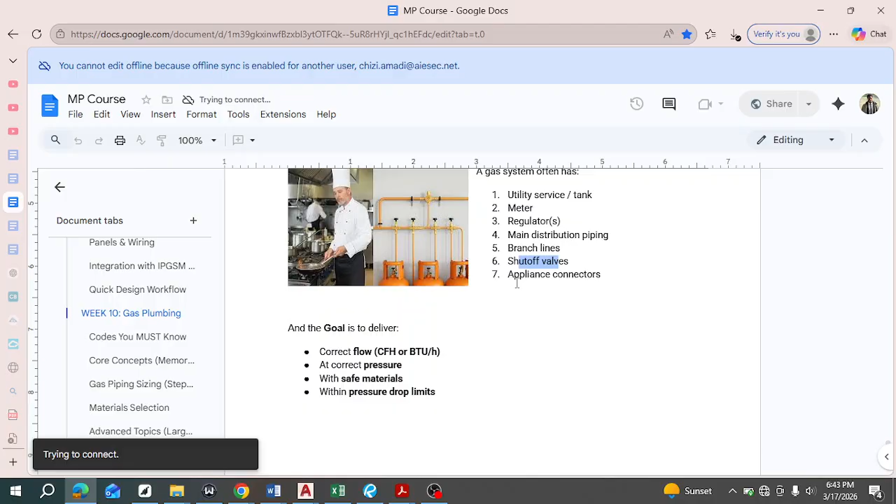Another thing is the appliance connector. So for each of the branches, we have the connectors. Each branch is going to a particular appliance. So how do you connect it to the appliance, right?

So next, the goal of this design is to deliver correct flow, that is the quantity, the volumetric flow. And CFH, you'll be familiar with it because it stands for cubic feet per hour, just like CFM, cubic feet per minute, in our air supply systems, our HVAC equipment. Then BTU, still close to our HVAC too. BTU is British Thermal Unit. So it's a measure of the amount of energy, right?

So this flow is referring to either the volume or the amount of energy, right? So then it also needs to deliver the correct pressure, and we use the safe materials with the safe measures and within the pressure limits, right? Because if it's too low, the system is not going to perform optimally.

If it's too high, it could lead to bursts and leakages and many other problems that could stem from it, right? So that is when the pressure is too high. I mean, pressure drop means that the longer the pipe, the lower the pressure is over the distance, right? So when it starts at the beginning, it's the highest pressure.

So you have to select a pressure such that by the time it gets to the last branch or the last appliance, the pressure is still sufficient, right? So another thing we are talking about is the codes, right? So each of the designs from plumbing to drainage through to HVAC, they all have codes to be followed. In fact, there are so many codes. There's the building code, the plumbing code, the gas code, right?

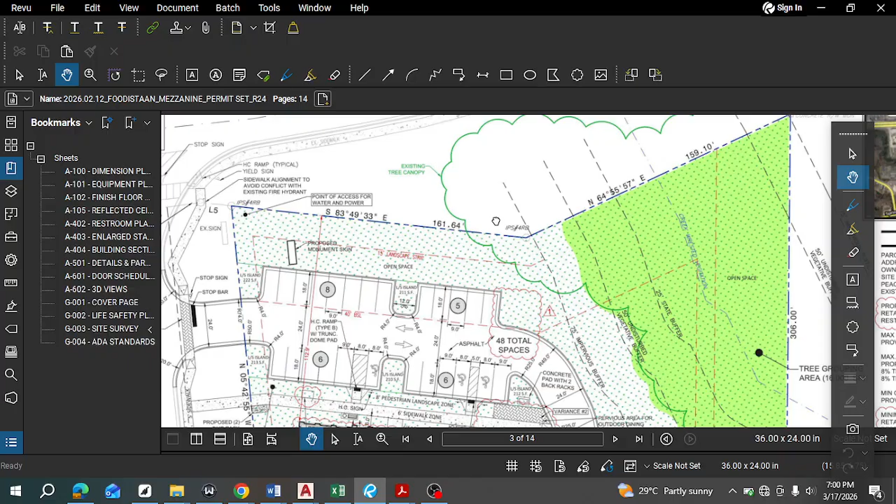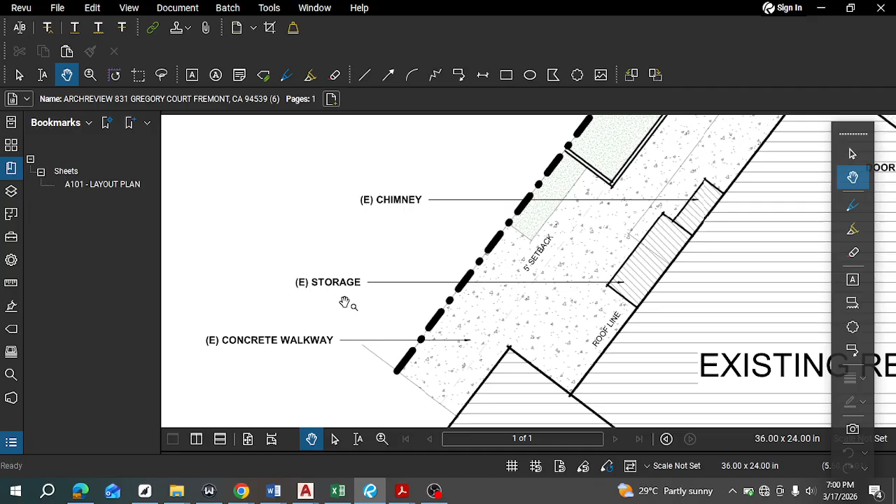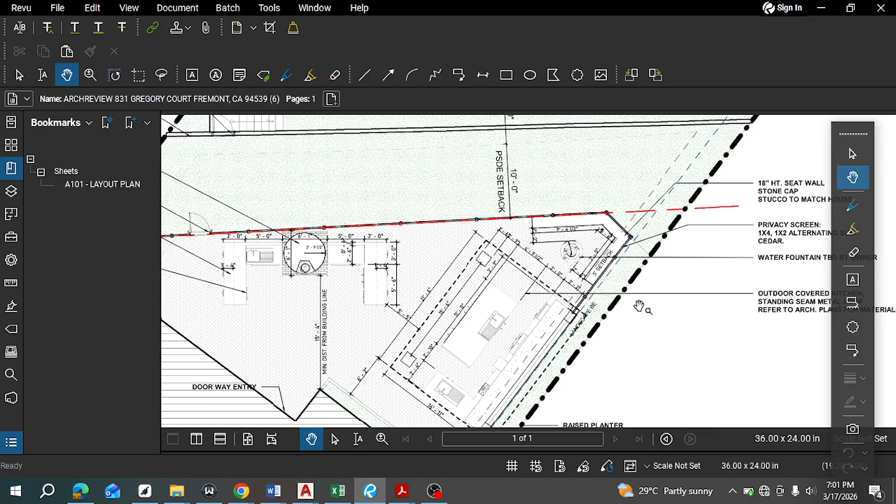For example, I spoke about how sometimes some gas systems use a tank. So in a plan like this, you might see such. Some important information of what areas around that place look like. So water fountain. Okay, this is an outdoor covered kitchen. This is a project we're going to work on soon. And there's a property line, which separates it from the next yard. So it can guide you: okay, this is where I'm going to set certain designs from.

That's what you do. Next, you measure the longest length. This is very similar to water supply plumbing. So measure the longest length. You would have seen, let's even look at a project. You would have seen the types of, okay, let's do this really quick. You would have seen the type of, okay, it's not here. Okay.

I'm looking for a, it's okay.

Let's just continue, right? So measure the longest length, like we measured. So the distance away from the meter, the gas meter, right? The longer the distance, the higher the pressure drop, right? So that's why this is important, so that you can size your pipe accordingly.

Next, you will now use the code sizing table. So these are like the two starting points, right? Then you now use our code sizing table. In this case, we're going to be using table 402.4(11). Oh, this is not supposed to be metallic pipe. There's a mistake here.

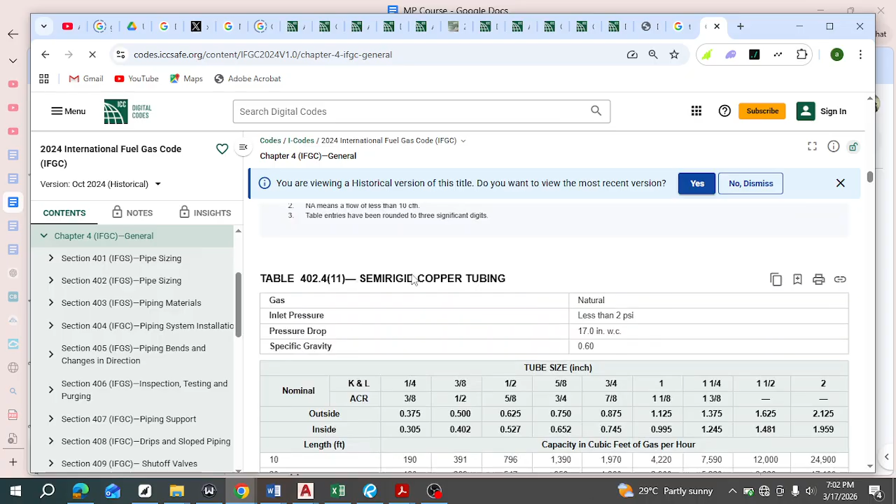So let's look for this table, right? I already looked it up, so it's just a matter of finding it. Wait a little, right? Oh, it has not. Okay, yes, it is. Right. So now, are you serious? Let's try and connect and load this page.

So just like the table for water supply, the table gives us an idea of different materials, right? Let's wait for it to come up. Okay, it's coming up. There are different materials and there are different loads, different distances. So starting from the beginning, you can read through all this for more information, but that's what we're looking for. Okay, these are the different tables.

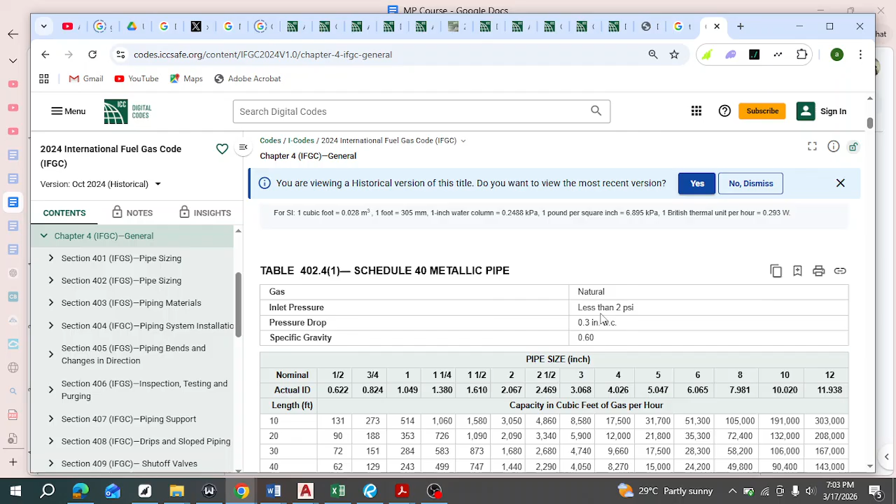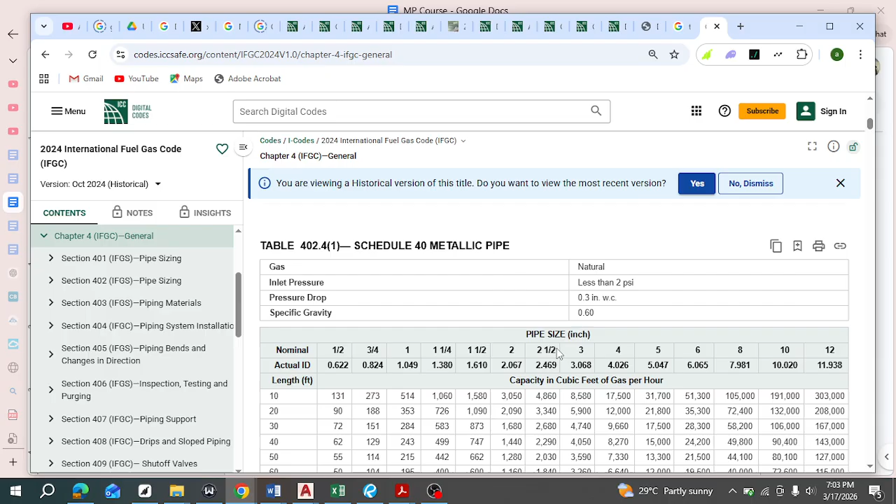It starts from one, which is metallic pipe, and you can see the type of gas, the inlet pressure, the pressure drop over the distance, not the entire distance. It's unit pressure drop. Then this is how you size the pipes accordingly. These are the capacity, cubic feet per hour, and then this is the length. That's how we trace and find the right size of pipe to use.

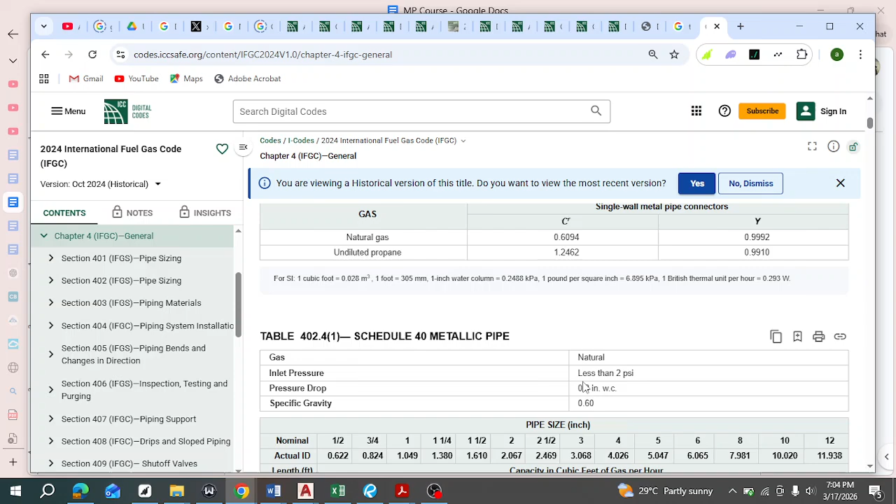So if your total supply is maybe 300, you come to here, and then use both the length and the total load. For example, the length is maybe 80 feet, come here to 300, so I go around here. That means the main distribution pipe will be around 1 1/4. That's if you are using natural gas, because there's also a place for propane gas too.

There's natural gas, then these pressure levels. But most times we don't use pressure levels that are that low, so you see it's changing. As you are increasing, this number is changing. So we have gotten to a higher pressure drop. Let's see this one, even higher, 3.5. We are still under natural gas too.

The one I'm going to use to do a lot of explanation, you can see that the material has changed. It was initially metallic pipe at the beginning. So please, I would like you to go through this chapter and read up more about it. So let's use this. We've seen all of this already.

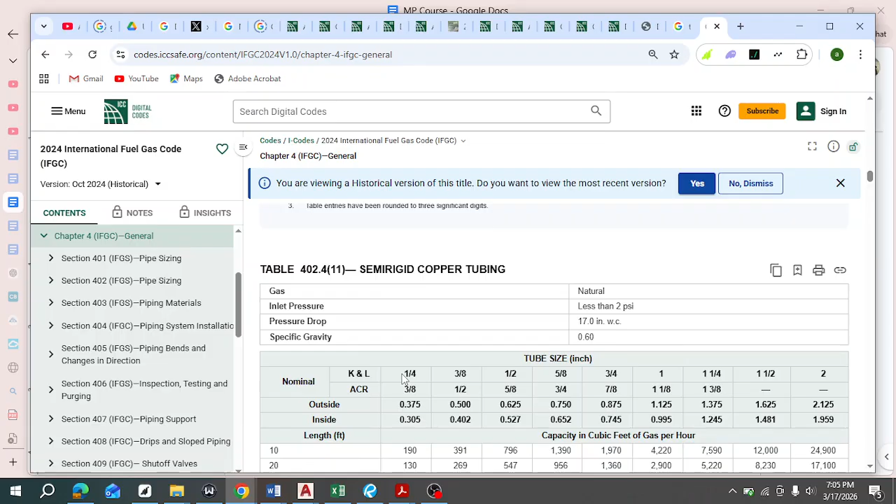This is less than 2 psi, so it's already a low pressure situation. We have two different types of pipe. Please look up what these mean: K and L semi-rigid copper tubing, and ACR. We're going to use K and L. So this is what it looks like. That's the table we mostly work with for general projects, while if it's California, you check if California has its own corresponding table.

Then next you size each branch and section. There's a document I use for doing this, a standard document called B703. Let me show you how. Okay, this is the document I was talking about. It's a standard document, just a 2-page document. Let's quickly run through what it contains.

So this is a brief schematic of what a gas layout looks like. It's a schematic with minimum information, but for you to understand. This is the gas meter, this is the main distribution pipe, and these are branches off of it.

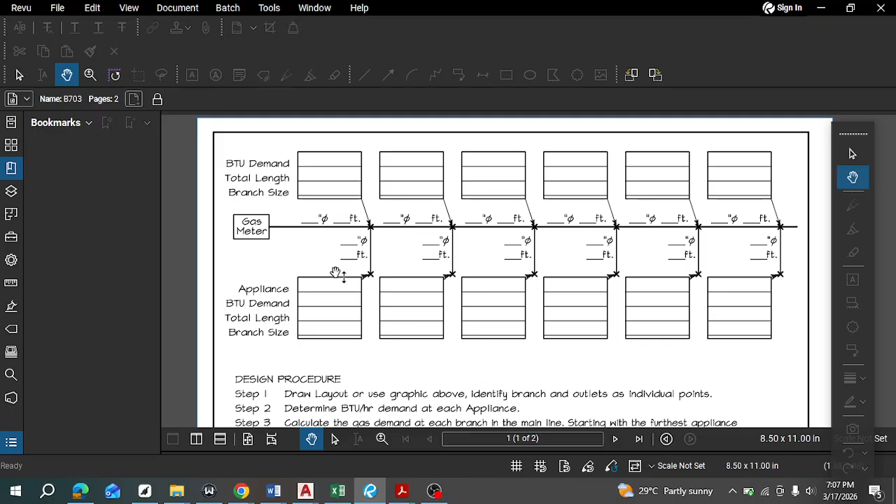Right, then we have the appliance name here, the BTU demand. Let's scroll to where we have the total length, and then the branch size, right? So we have: draw layout, use graphic above, right? So you can draw this when you're designing a gas plumbing plan, right?

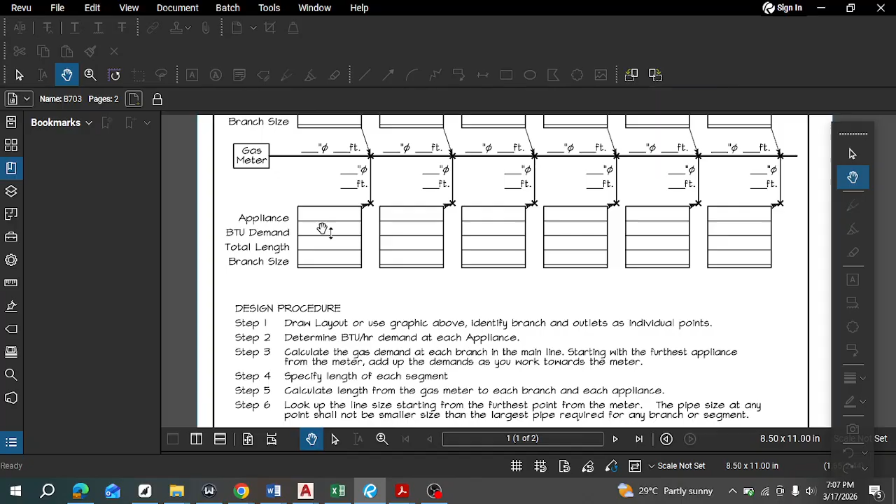You determine the BTU per hour, calculate the gas demand on each branch, right? So we are talking about each branch now. Start with the furthest appliance, right? And then add up the demand as you work towards the meter. Okay, this is what it looks like. So this is the appliance, this is the BTU demand, and the length, not the maximum length, but the length up to that point, right? This is at each branch.

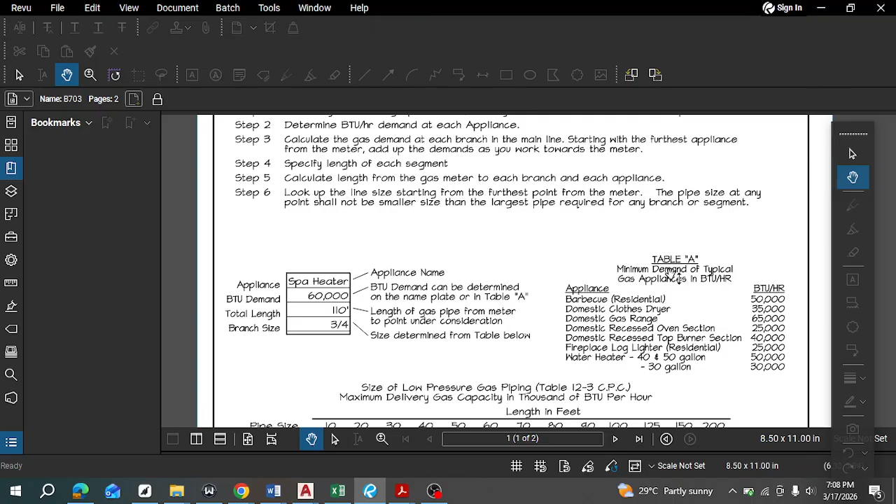Then look, as I mentioned earlier, we have average values, right? If for any reason you don't have access to the specification sheet of your appliances, you can use these values. They're like standard values. But if you have it, it's better to use that. This is in case you don't, like a last resort. You have a fireplace, 25,000 BTU. You have a range. You have a clothes dryer, right?

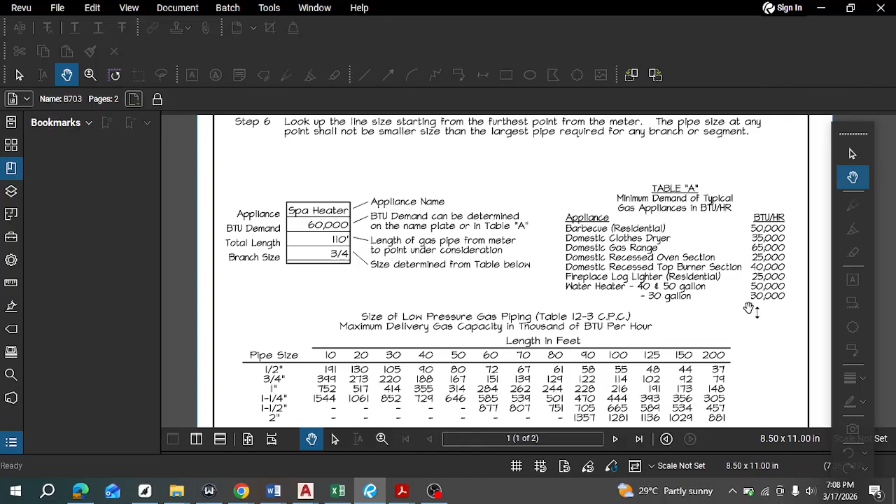You have water heaters of different gallons, different volumes. This is a tank water heater, right? So you can't use the same values for tankless, because tankless usually demands a higher amount of gas, or consumes more energy. That is why I generally don't like choosing tankless water heaters, even though they provide water on demand. The energy consumption is usually very high, because you have to produce a lot of water within a short period of time, as opposed to a tank that produces it at a lower rate and then stores it.

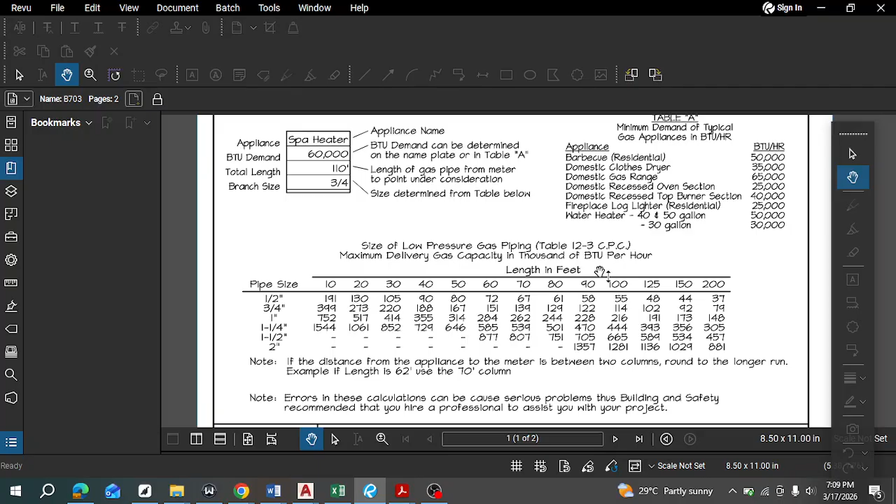So yeah, this is the table. This document is actually directly related to CPC, chapter 12 we spoke about earlier, that is California Plumbing Code, right? Okay, these are some notes to take note of. This is just like how we had that sizing table. This is what the table for California looks like. You notice they've referenced where they got it from. You see the pipe sizes, you see the length, then you see the total load, right?

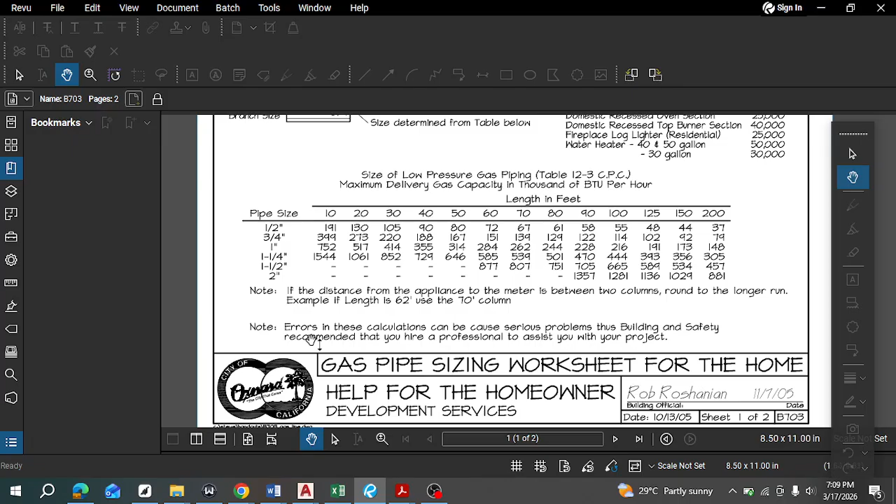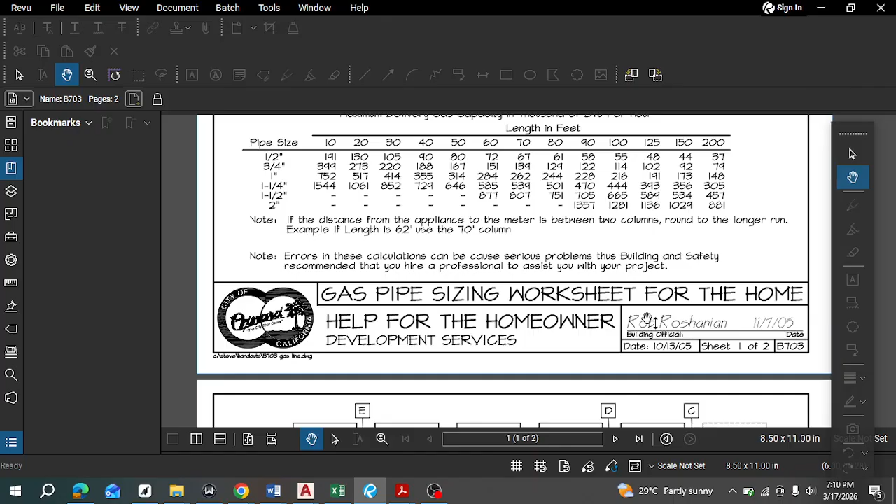So just to understand it: you can see errors in the calculation, so there's a lot of disclaimer, a lot of warning for you to pay extra attention. See the name here, prepared by a professional, obviously. So now this is an example of how to size. We have six branches or six appliances being served by a gas plumbing system, right? Thankfully they all come with their BTU demand. So now let's quickly study what all this information is.

So here you see this is a sign of diameter, so this is the main pipe diameter. At the beginning it is 1, then as it goes towards the end it reduces to 3/4 here, 3/4 here. Now this is the distance. So from this gas meter to this first branch is 10 feet. Then from this branch to this branch is 20 feet. Now from the point where it branches off the main distribution pipe, the appliance is 100 feet away.

So when you are checking for the total load, you take that entire distance, because the gas has to travel this 10 feet plus this 100 feet. That's why I have 110 feet here. Same here, it has to travel 10 feet, 20 feet, and then 5 feet, so you add everything up and it gives you 35. Then from here it travels 10, 20, 20, that is 50, then an extra 10 feet, which gives us 60, right?

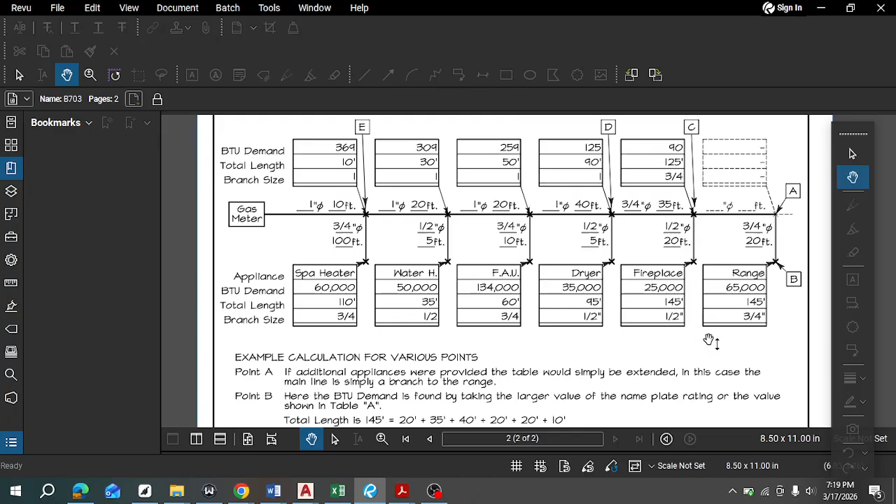So now we take 150 and then we check the capacity of the pipe, the BTU demand, which is 92, right? Is it 92? Okay, in this case, 92 exceeds. Yeah, it's 92. That's for point B. So we are looking for 65, which is what we have here. But when we trace this down, we have to select a value that is higher than or equal to 65, which is 92 in this case. So 44 does not serve because it will be insufficient. 173 is too large. So just the next highest value, right? So that's what we use.

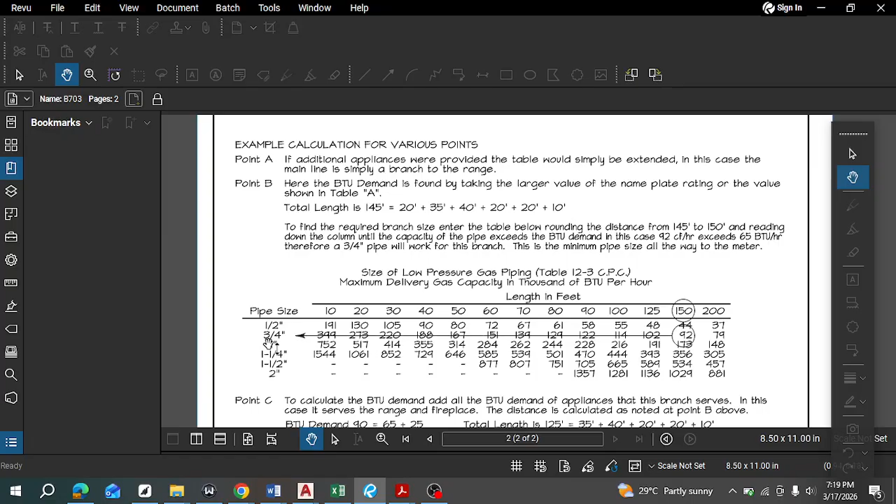So now we take this distance and this gas demand, and then trace it back. So it means the pipe for that point will be 3/4 inches, right? And that's why we have 3/4 here, 3/4 here, right? Now let's check for another point.

Point C. Point C in this case serves the range and fireplace, right? So which is range and fireplace? Point C is this, right? So it means it's serving both this and this. So the total distance and the total demand will be different too. So let's check. The total distance is calculated from here, which is 125, right? And then the total demand is 90, right? So let's check it.

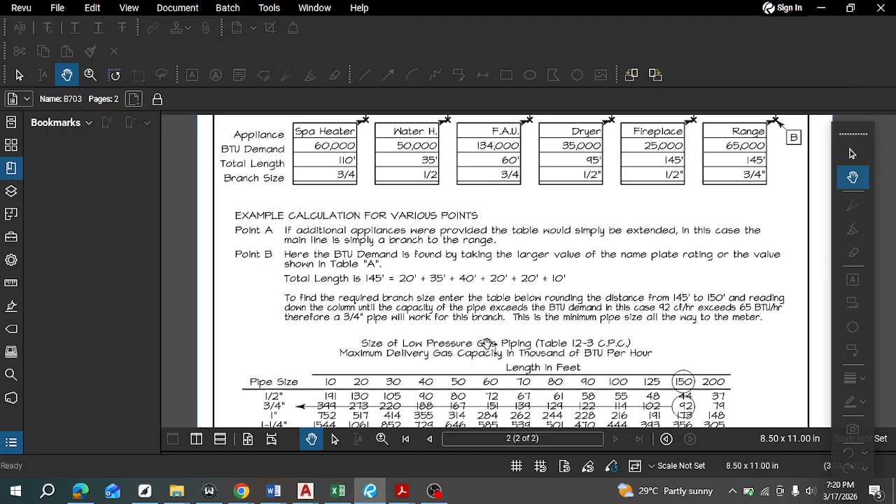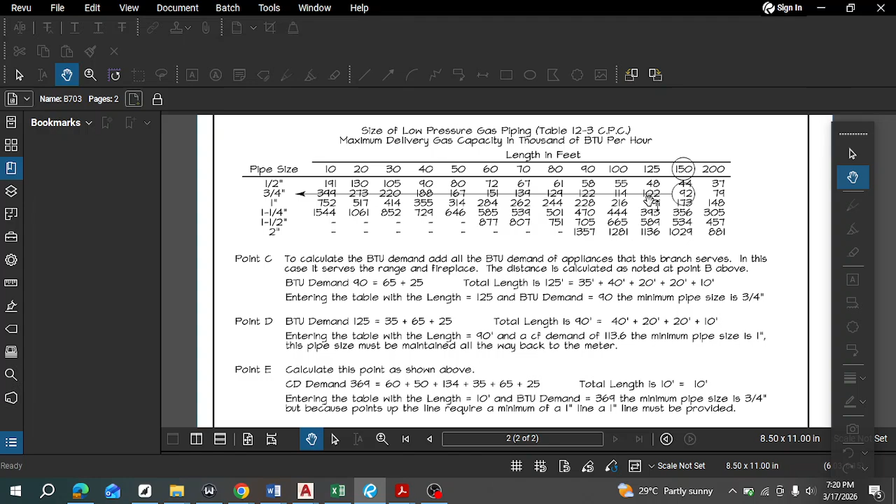Okay, you can see here BTU demand is 65 plus 25, because at that junction it's supplying two things. So that's why we have the total, right? Because when it drops to this guy, it moves on and gives another guy. Then the total length is reduced. So as this one is increasing because it's going backwards, that one will be reducing. So when you check, you go to 125, and then 90, you go down to the point of 90, and 102 is the closest point. You have 3/4. So that's how you just continue for the rest of it.

We have the shut-off valve, like I've explained before. It should be placed at the main entry point, because you may need to shut off the entire gas supply, and then at the individual appliances. So if there's something you want to do at an individual appliance, or in case of an emergency, you shut it off at that point while the others keep receiving gas, right?

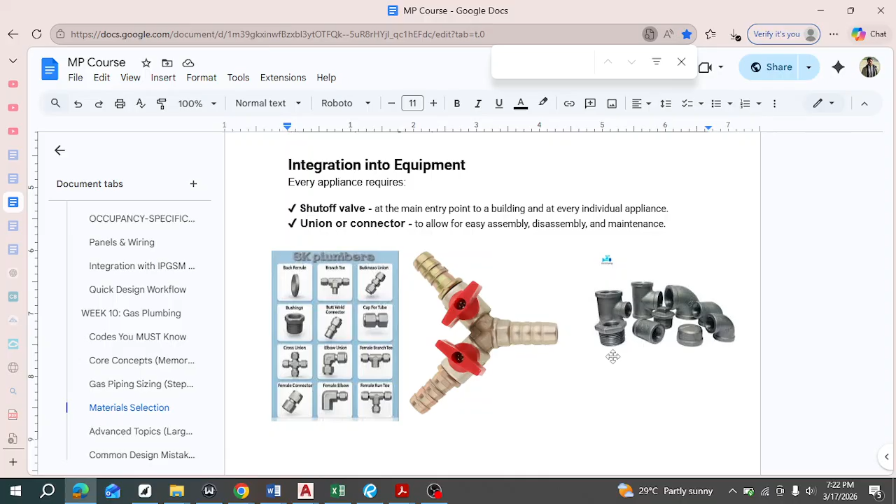Then you have the union or connector. As the name implies, it's used to connect, right? Just like how we have fittings. If you need to connect two points and then maybe release at one point, you have the different types of fittings, right? So you look them up.

Then we have the sediment trap, very important, right? You may not show it on the design because it's very small, but it has a very important purpose. It is required for appliances like furnaces, water heaters, and boilers, to collect debris and moisture, preventing burner clogging. This is a kind of safety measure, because gas usually flows with impurities if it's not very clean. There are different levels of purity, so particles, then moisture too.

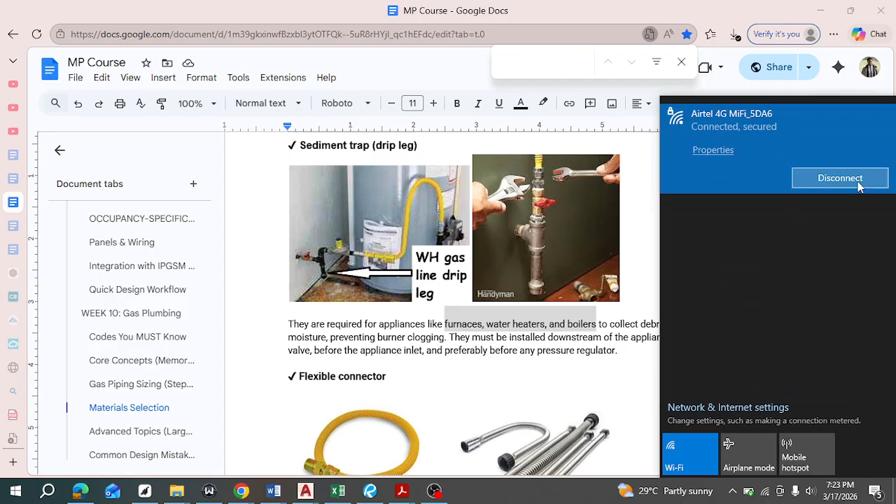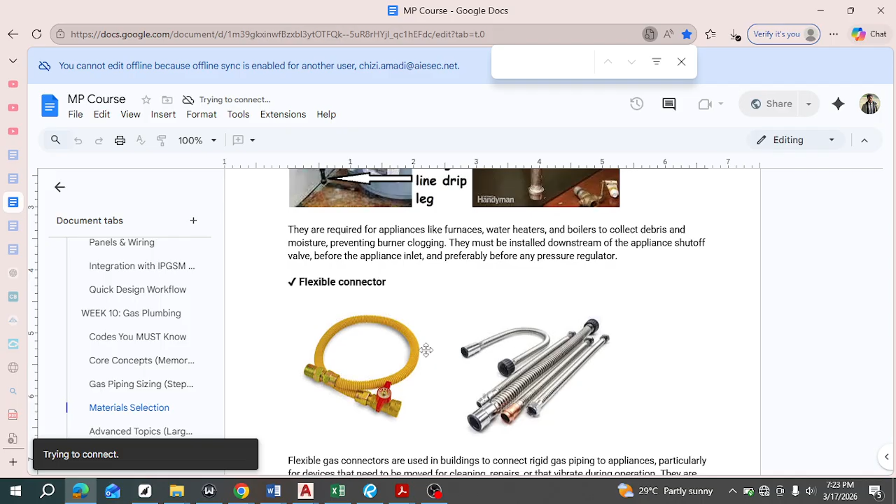Then you have the flexible connector. The flexible connector is used to connect to rigid gas pipes. So we have the main pipes and then the branches, particularly for devices that need to be moved for cleaning. You know that the main pipes, solid pipes, are rigid, as you've seen here. If there's vibration or movement, they can crack.

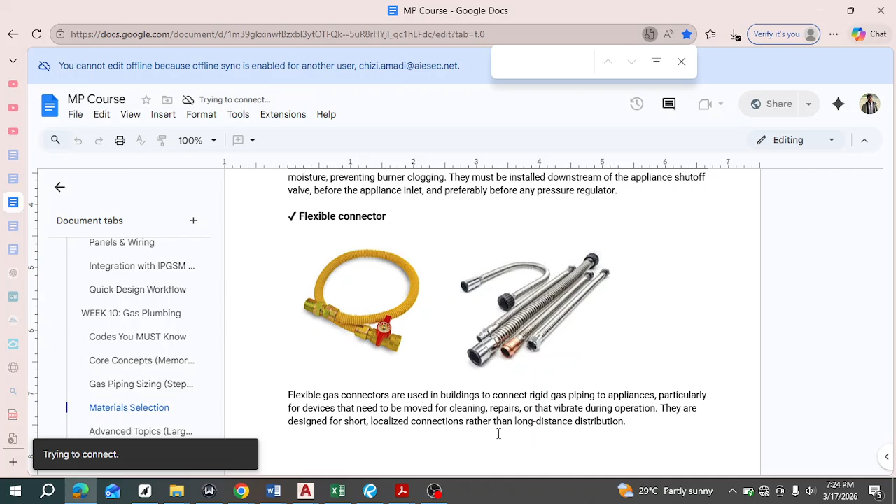So it's important to attach this just at the point of connection, in case it vibrates during operation. It is designed for short localized connections, so it's not for a long distance, just for that small connection. It's like a wire, so it has room for being flexible, which reduces chances of cracking or leakages due to shaking, right?

So that is the end of the class. Let's quickly look at a project before we call it a day. Let me check how many minutes we spent first.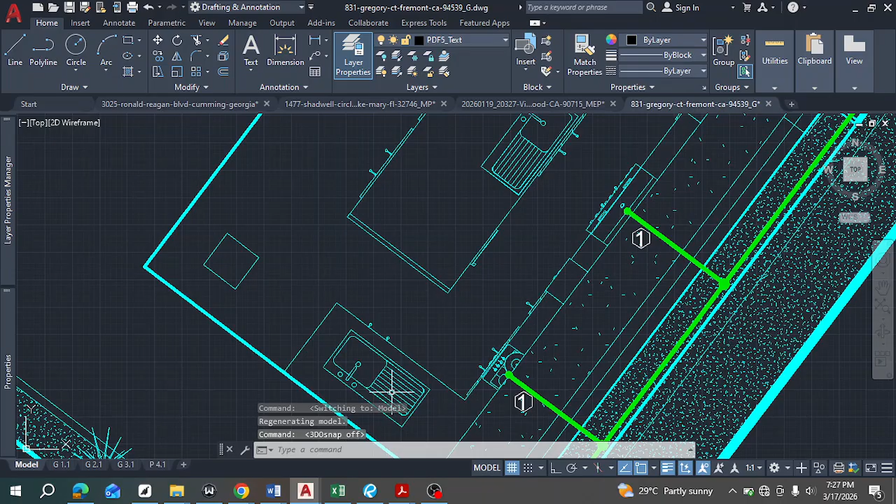Okay, let's look at this project real quick, right? So to save time, I've already shown you the layout, so you understand how all of this works. We have just 3 appliances on this. So this is where our layout comes from. This is our gas meter, because we got from the site plan that this is where the gas line runs, so it was important and expected to connect it from this point, right?

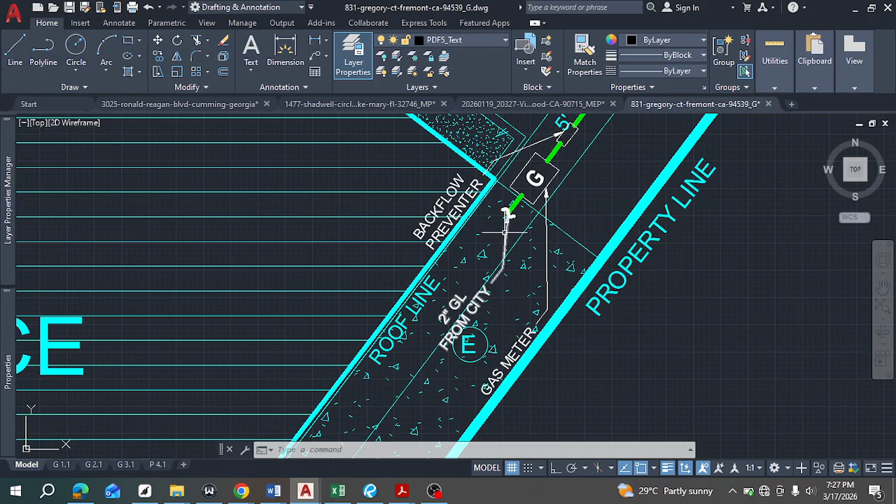So just like in freshwater plumbing supply, we have our backflow preventer to prevent gas from flowing back. Then we have our meter as necessary. Now we have our pipe sizes; we'll look at this shortly. So this supplies to this point. There's a range here. When you go forward, there's another. Let's check what this is. Okay, we have the burner, which is like a range, which is the closest to the gas meter. We have the grill. We have the fire pit, right?

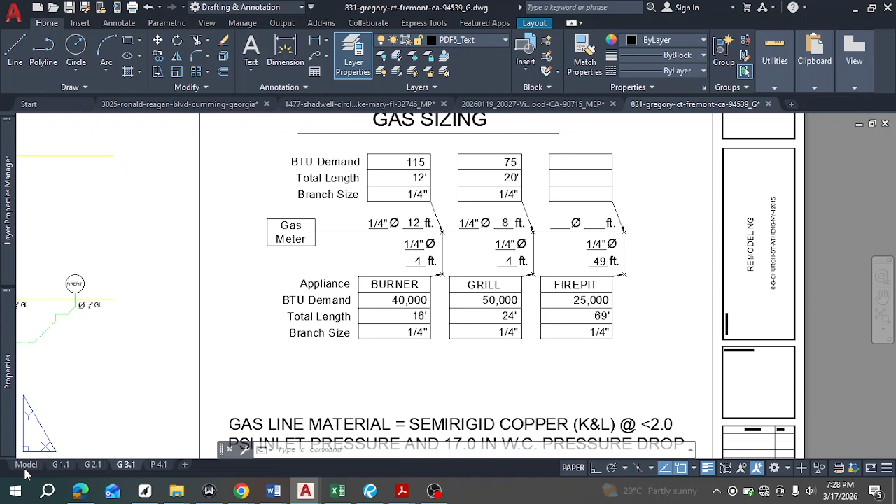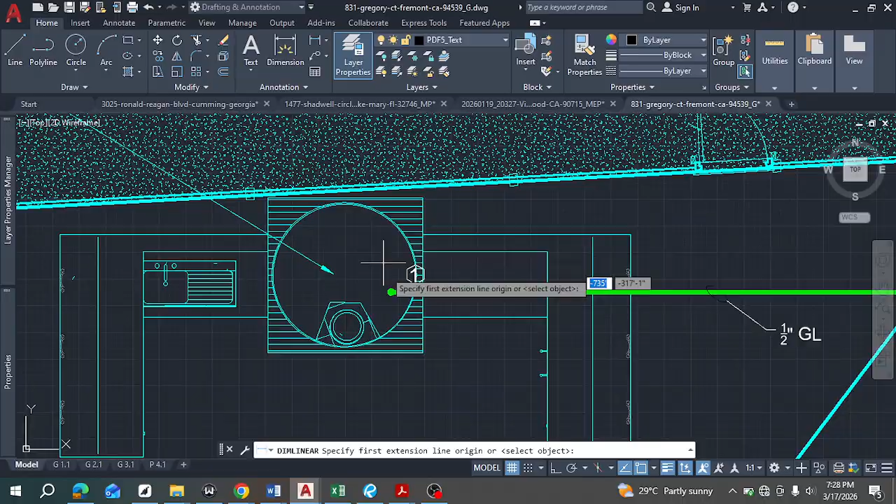So the major thing is sizing, right? Sizing. So we have a fire pit here. This is the farthest point away, so you have to measure your distance up until this point. Let's measure that distance quickly. You already know how to do it, but let me just give you an idea. So this is how it works. Okay, measure this, 31 feet, for example. So you do that for all of them to get your total distance, right?

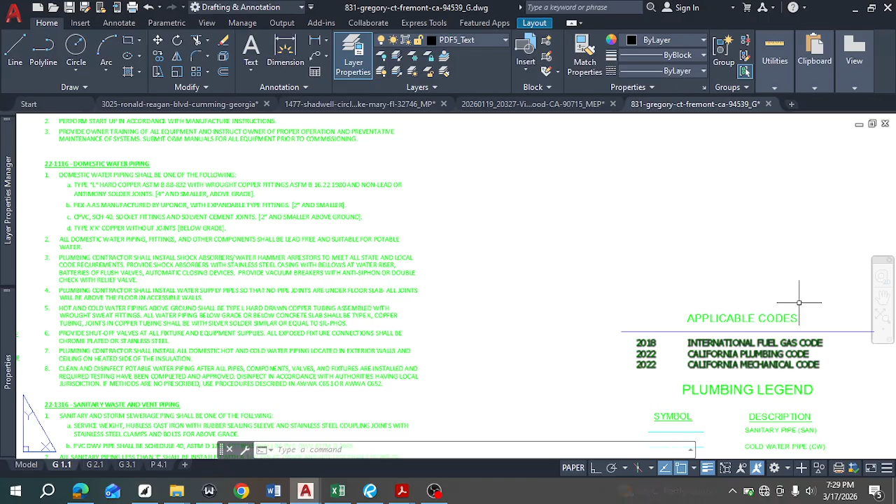Right. Now, what does page 2 show? Okay, G3. Let's go to G1 first and see what G1 holds for us. G1 is just the notes: the plumbing notes, gas notes, and then the index, the codes used. Like I mentioned, it's better to specify. Then G2, these are the different pages.

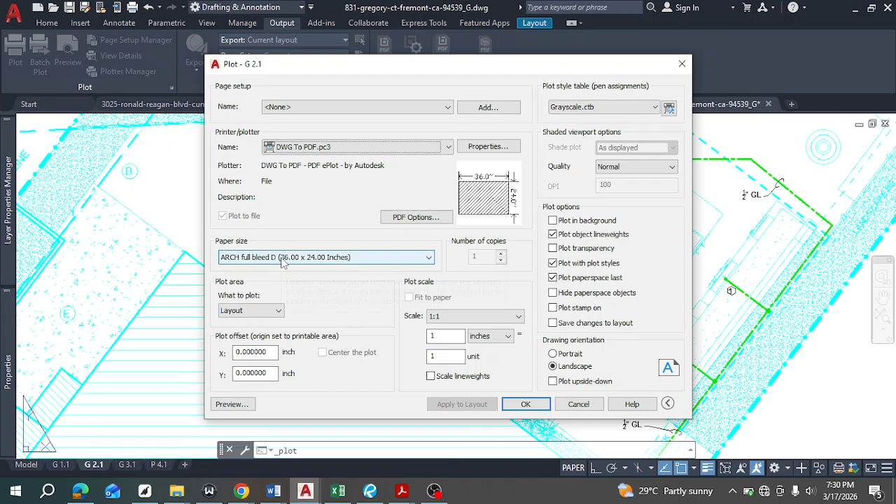Oh, perfect. So G2 shows just that portion of the design. It's visible here, but if you print it out, this color is not showing like this. I know I've shown you how to do it before, but let's look at it again. So just plot. We've never really printed, but I think we've set up all of this. So you have grayscale, which shows between black, gray, and white. Then we have the full bleed, which is the paper size. Let's preview what it looks like.

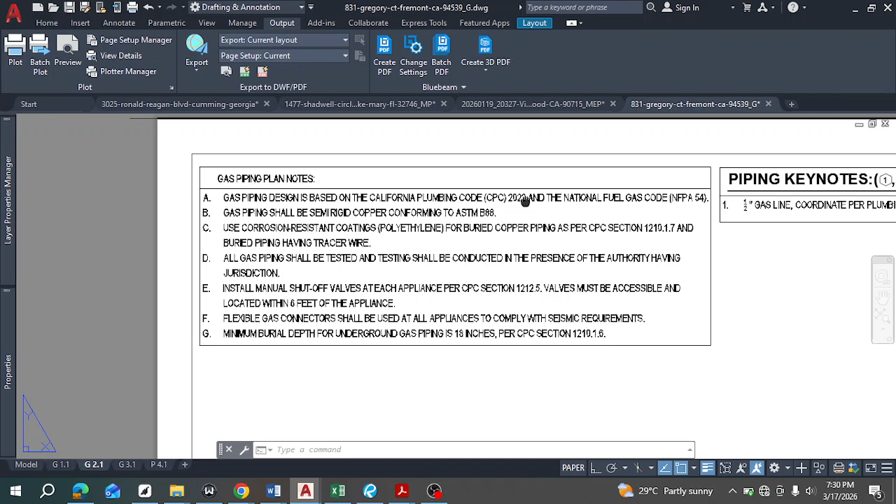Okay, you see now that it is gray, and gray is for the background, things that we don't want to stand out, but the other ones are in black, and then we have the gas line too. So escape, and escape again. Now let's go to the sizing of these pipes. Okay, these are some gas piping notes, and this is just the key plan or the keynotes.

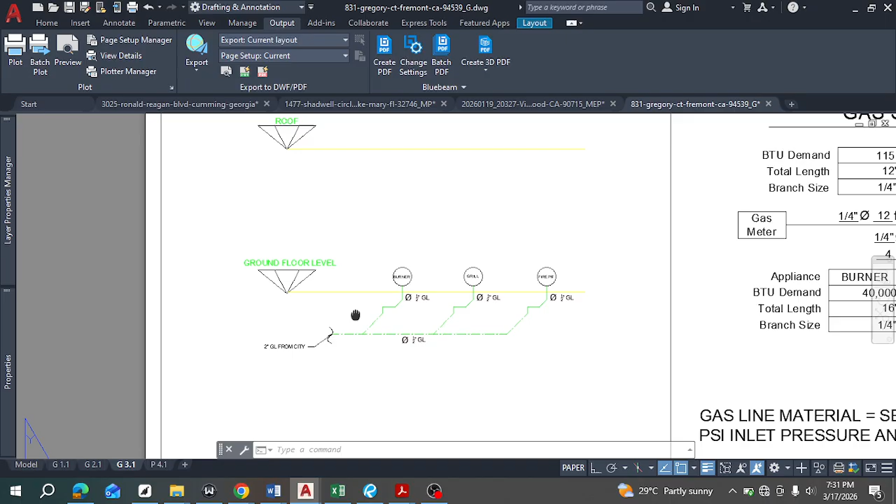Let's quickly go to, okay, this is a riser diagram, right? It just shows us a brief of what our gas supply layout looks like. A schematic. If you notice, this is an outdoor system. This is the main building, but we are not dealing with the building. This is outside, so this is an open air kitchen, and this is open air too.

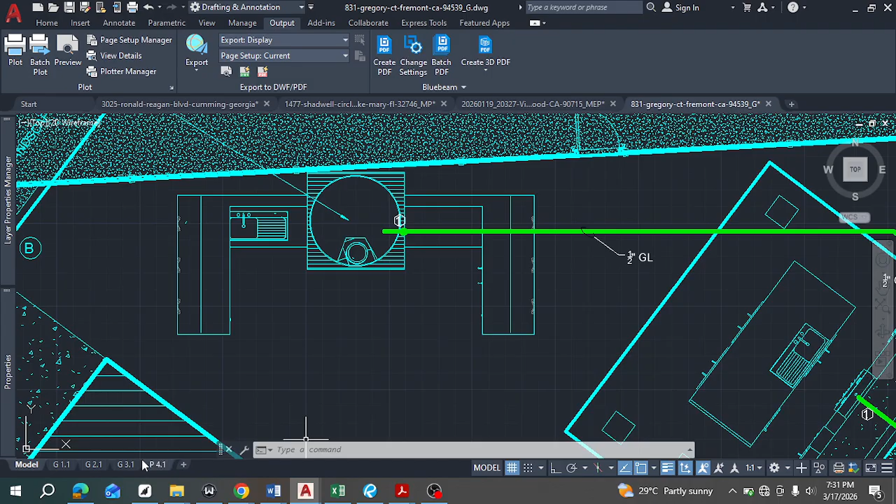So it's mostly outside, so it makes sense that we are connecting underground. Our gas is going to travel underground, so that's why we have this. It's coming from the city gas line, and then these are the sizes. Okay, now this is the part that we want to look at before we leave for the day. We use semi-rigid copper K and L at under 2 psi for inlet pressure, that is the pressure at this point.

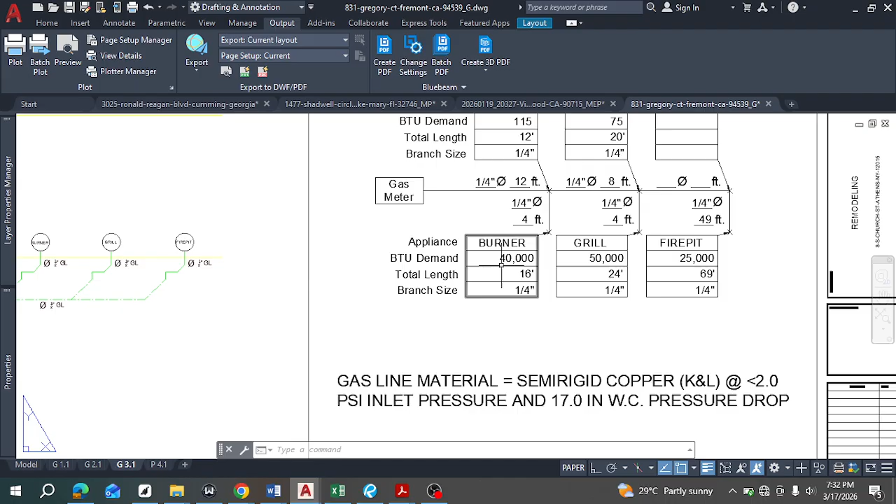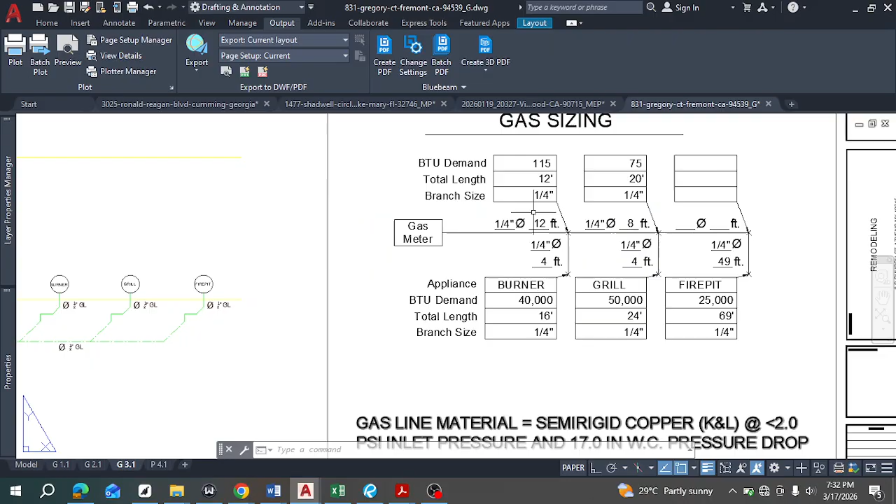Okay, this is where the table is. So this is what we are using, less than 2 psi, 17, in terms of pressure drop. So now let's get our total length and our total demand, maximum demand, which you've seen here. Total demand, because we've added up everything up until this point. So at this point is where the largest demand is.

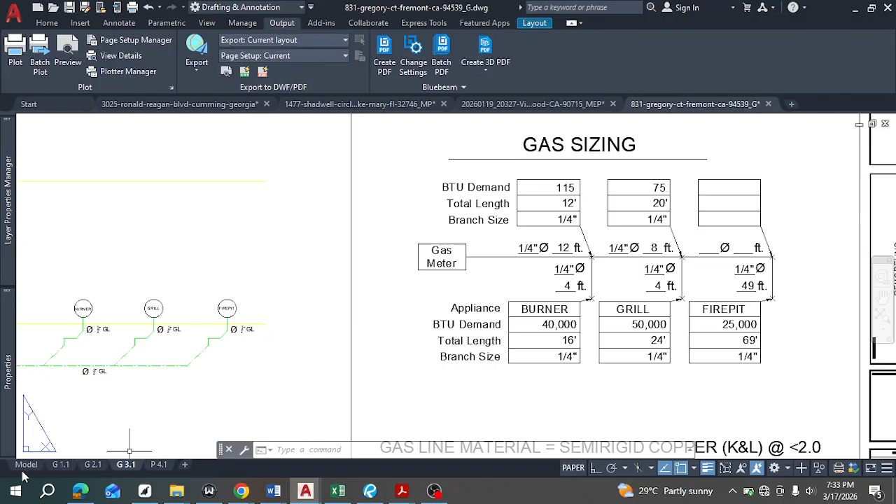Then the total length is measured in this distance, so it's 69 feet, because the distance from the gas meter to the first appliance is 12 feet. Then the distance for this appliance, the branch itself, not the appliance, because as you've seen here, we have the main distribution pipe, which is this. Then we have each branch, so each branch branches off at this point.

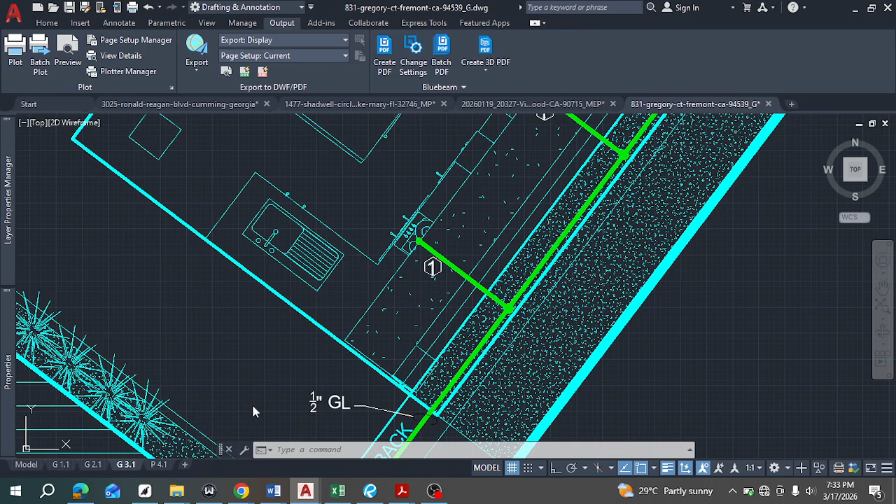Now we have another distance it travels, right? In some cases this is a short distance, but this is a good example because it is relatively long. So that is what that distance is, which is 4 feet, the distance of that branch. So it's also the same thing here, 4 feet. Now this last one is the entire distance it travels from this branch to this last point.

So now sizing this, as you said before, let's start from this point. So we see total distance is 69, and then the gas supply is 25,000. Now this 25,000 is in BTU. Remember, we need to size in CFH, because that's what the table carries. So let's check with the calculator. This is natural gas, so you divide it by 1034.

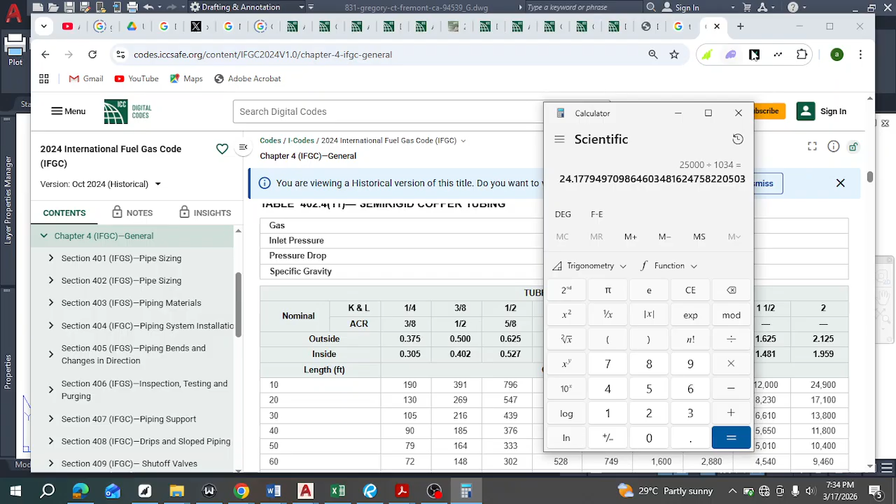So 25,000 divided by 1034 equals 24. So is it 24? No, it's not 24 we are using. We are using the maximum sizing for this point. So it gets confusing, but you need to take your time and understand it well. Let's go back to our document, because sometimes it confuses me too.

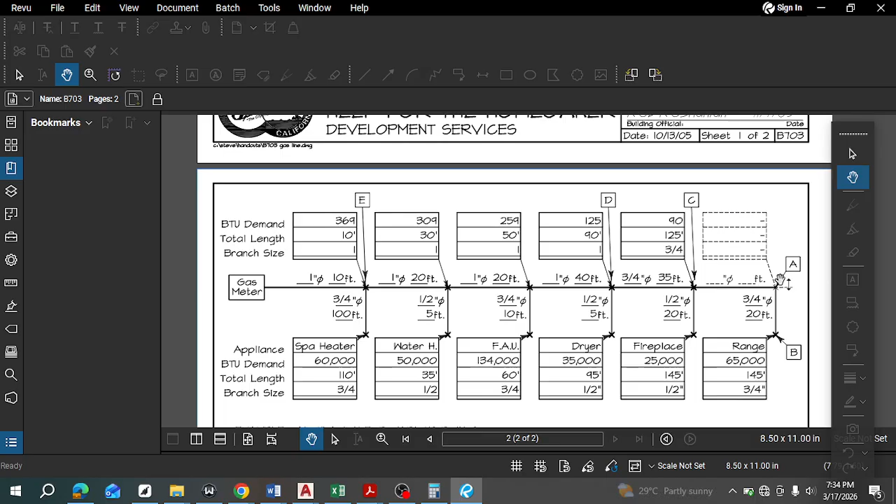So sizing at this point A, you are taking the total length and then the demand at that point, so that means in this case it's 25. We got it right, and total length. So this is what we are using to size: 25,000, which is 24 from this calculation. So we look for 24 and then at 69 feet.

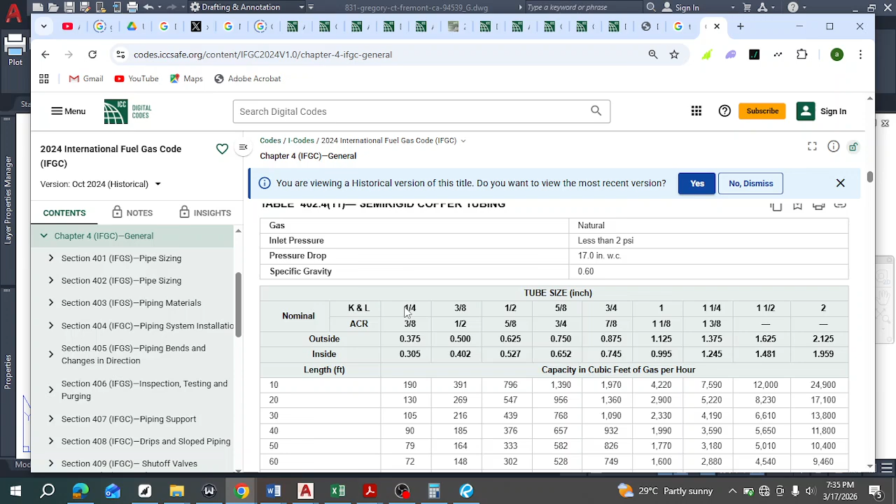Let's check our table. 24. So it will be somewhere here in terms of length, and then 65 it falls here. So that's why we have 1/4. So this is the size we are selecting, 1/4. That's what we have here, 1/4. So now we move on to this one. I want to check for this one.

So in this case, we check the total length, which is 24 feet, and then the grill, the demand at this point. So if you remember, this pipe is sizing only this. Don't be confused, only this. So we use just the amount of gas traveling here, which is 50,000, and then the total distance. This distance, remember, is the sum of all of these, 12 plus 8 plus 4.

That's why it's really important to fill out these boxes first, before you start selecting the sizes, so that you just have to take it and it doesn't get confusing. So we filled all of this out, so we know this, we know this. So let's check 50,000 at 24 feet. 50,000 divided by 1034 would be equal to 48.

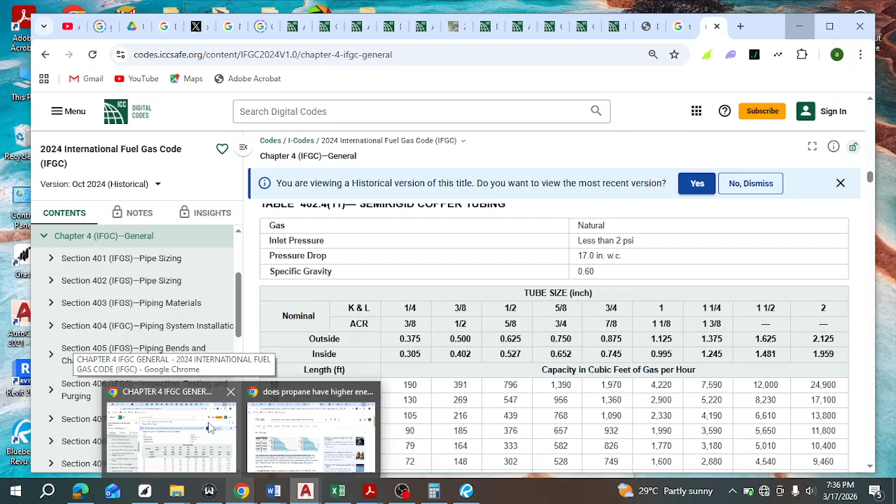So we check 48 at 24 feet. 48, okay, 24 feet. Oh, I made a mistake. 69 feet, it's 69 feet we had before. Although it doesn't change much. For 69 feet, 70 is what we'll use. 70, at 24.

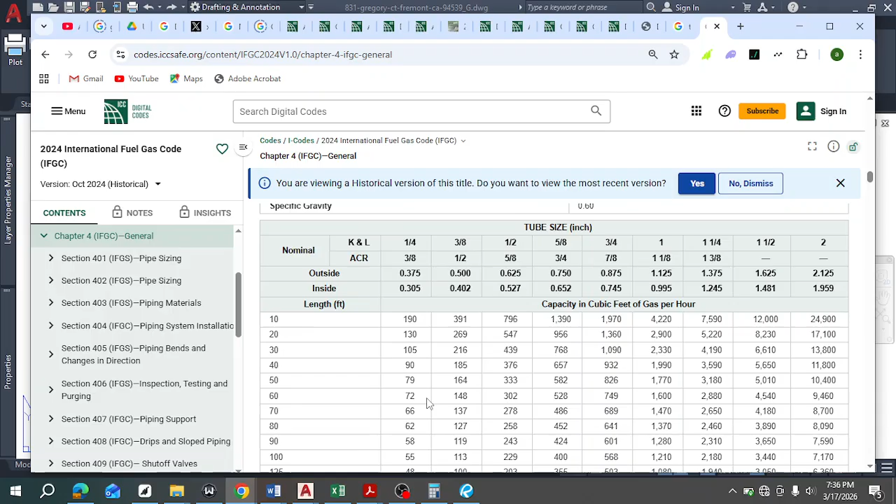Okay, let me not confuse you. Let's go back to this. So I made a mistake here. So we used 25,000, which is 24 when we divided it, and 69 feet. Don't get confused. So for 69 feet we use 70, because this is the closest larger value, and then 24.

So 24 still falls under 66. If it was 67 and above, it would have gone to the next column, which would have been 3/8, but it still falls under size 1/4. So please, let's not get it wrong.

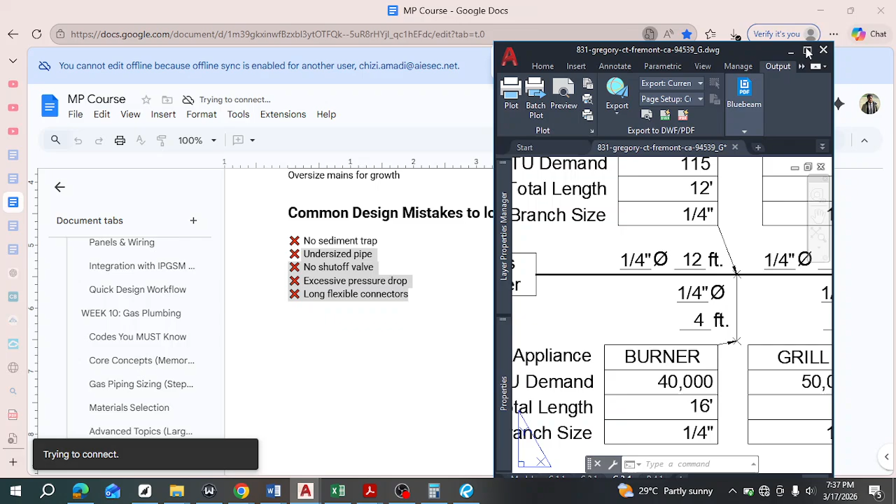So for the next one, it is 50,000, which when divided became 48, and then 24 feet. So let's check 48 at 24 feet. That will be somewhere here, and 48 still falls under here.

So it falls here. When you have found the distance, you check in this direction, not down. So this is the closest, right? So that's 50,000, so use 1/4. In this case, virtually all of them used 1/4 because the values are close to each other. But in the next project we'll design, we'll have larger demand, so the values will be changing. Right, so 1/4.

So now let's size for the branch pipes. We check for this one. That'll be 40,000, which is about 30 something. If you divide it by 1,034 and 16, it will still give you 1/4. Now let's size for this main pipe, the pipe at this area, right?

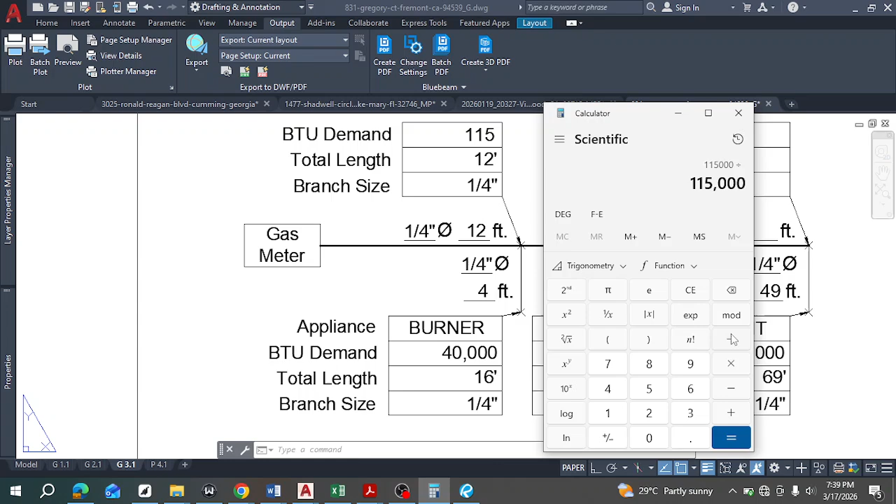So we'll take the total demand and total length. Length is smaller here, because it's just 12 feet. So we take 12 and 115. 115 is 115,000, so let's divide it. 115,000 divided by 1,034 equals 111.

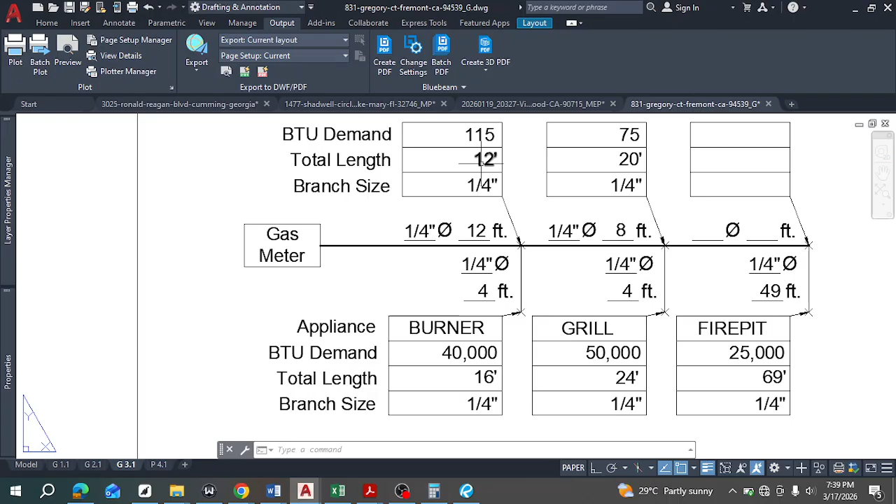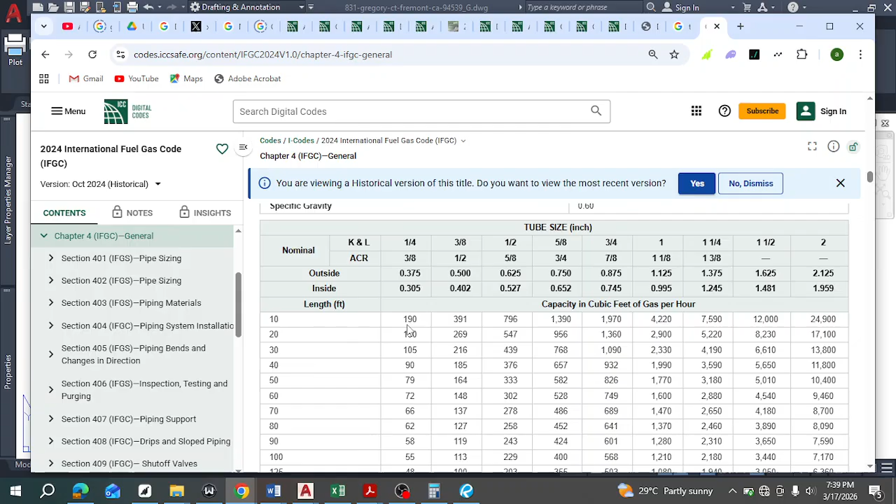So you take 115 in demand and total length 12. Usually start with the length, 12 feet. So you come here, 12 feet is just above 10, which is 20. So 115 falls on that, and we still take 1/4, right? So that's how we size for all these points.

At first, when you just copy, all these tables will be empty. Then you fill in the name, the demand, the length. You have to measure for the length, right? These first two you can fill in to start with, but this one you won't have any information, so you go to your design. Let's do it. So this is 12 feet. Let's go and check.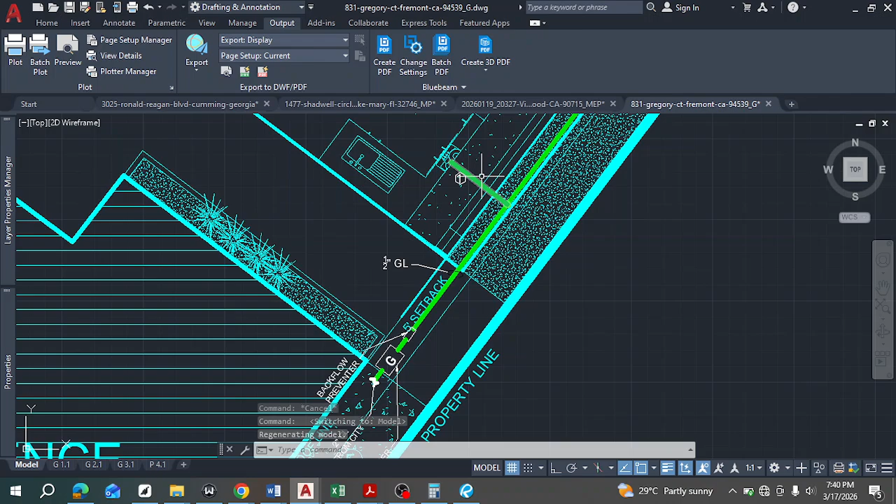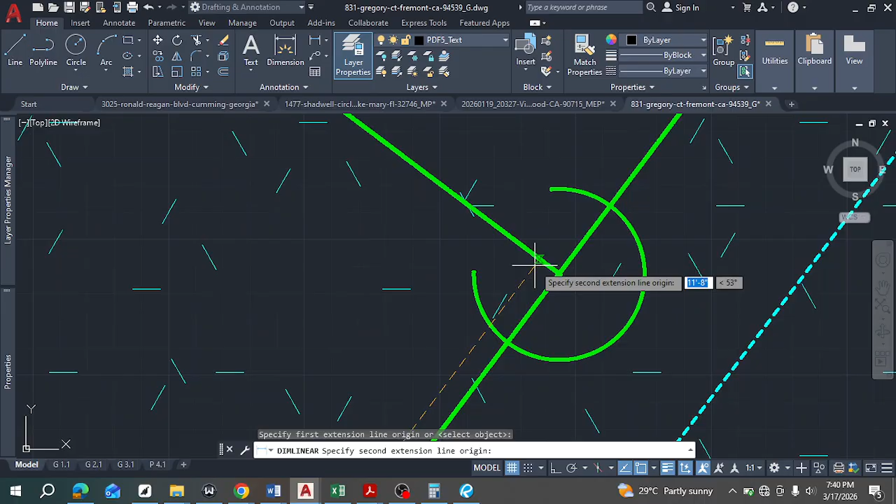From the gas meter to the first appliance. So let's say home, measure. Remember, there are different types of measuring: aligned, linear, angular, depending on what you're measuring. Let's see if this works. To this first point, where the branch takes place. You see, this is not what we want. This is giving us only vertical.

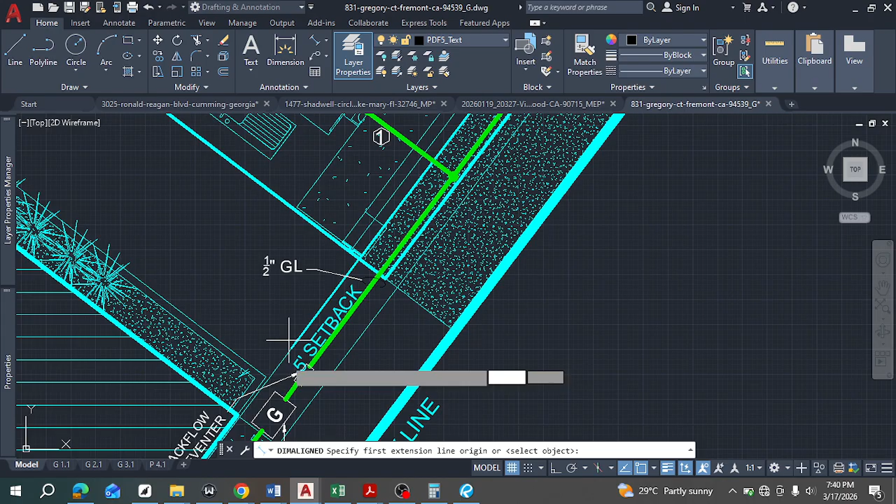This is a very good project to describe this, because it gives us only vertical and horizontal. This is not what we're looking for. We need aligned. Aligned means it follows the line, and this line is inclined at an angle. Perfect, this is exactly what we need. You see that it is 11 feet 8 inches, which is approximately 12 feet.

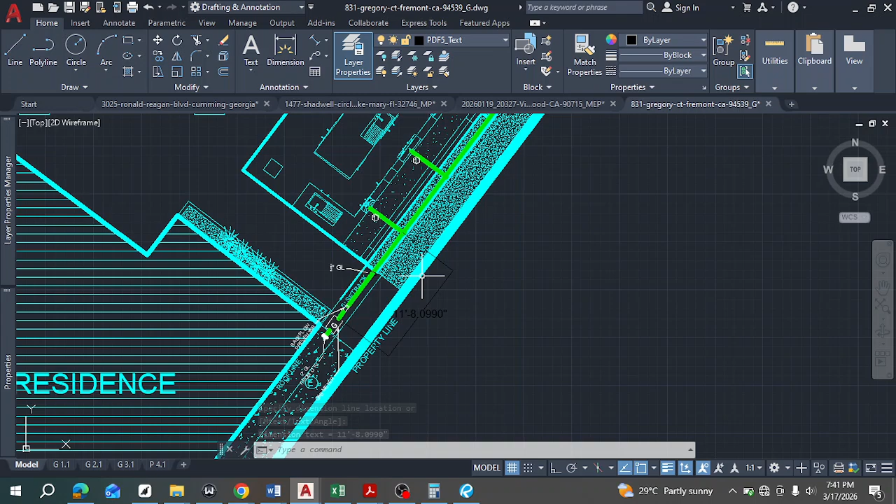But what I usually do when I get distances like this, if I approximated this one up by 4 inches, let me show you what I mean. It will mostly never be in round figures. Now you see this one has added up to 7'8". By the time you get to the next one, if you keep adding, this becomes 8, this one becomes 12, and it might end up longer than the actual pipe,

because you are approximating upward. So whenever I have a case where maybe it's less, like 7 feet and 1 or 2 inches, I round it down to make up for the one I rounded up before. So at every point in time, I'm making sure that I'm balancing out the sizes.

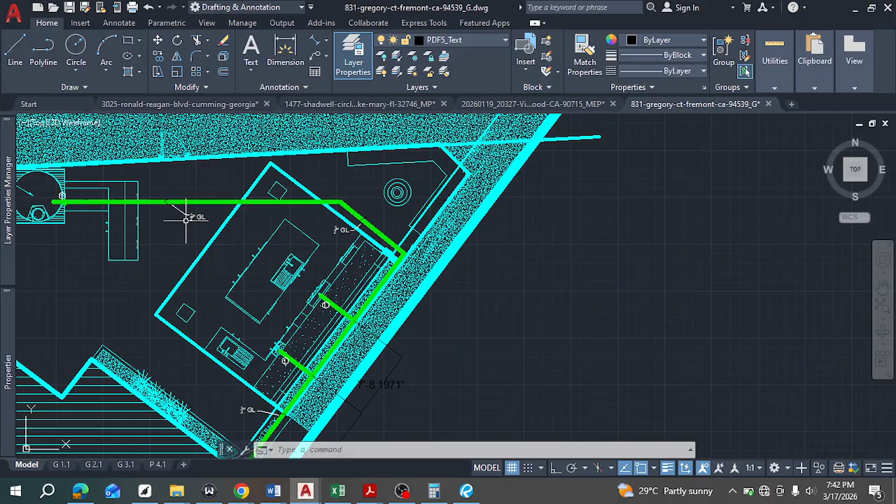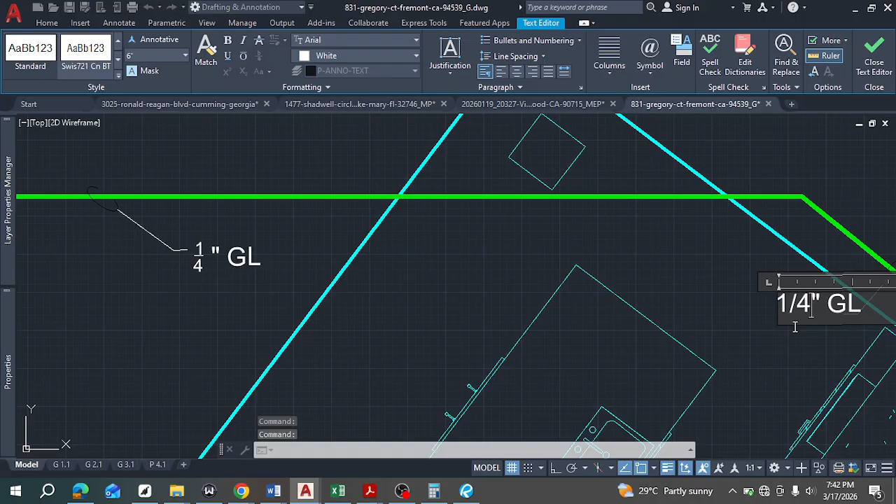So the main pipe size, oh, this should be 1/4. Thank God we saw it. For all of them it's 1/4, because we've confirmed that every pipe we used is 1/4. So that is pretty much how it goes. You measure that distance and then you come and fill it in here.

The first one is 12 feet, and then you measure this distance, right? It's 4 feet, so I have 16 here. So you keep going. This one is now 8 feet away. So 12 plus 8 is 20, plus 4, 24, right? So when you measure along this distance, the main pipe, you put your value here. But if you take it down into the branch, the appliance itself, put it here, right?

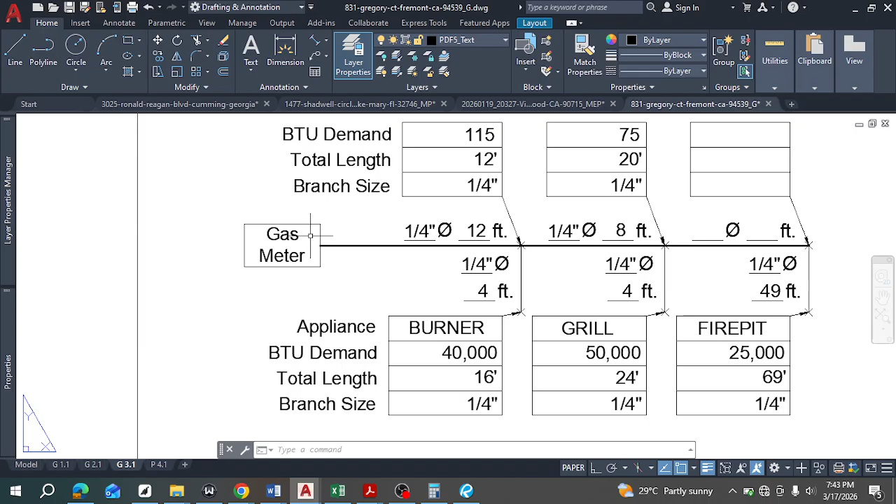This helps in sizing, because if you're sizing at this point, you're sizing this distance up to this point. But if you're sizing for this point, the main pipe, you're sizing for just this distance, right? So that's everything we need to know, right? So you would see if you can design another project, right?

I've not printed out for you before. Let's do that today. So output, oh, we have a lot. We have other projects I'm working on currently, but let's see what I can do regarding output. So batch plot, you probably don't know about this. Let's just look at it. Plot is the way you can print page by page. So if we want to print just this page, you use plot.

But if you want to print pages that are aligned, you see here that it's G1, G2, G3. So it's like pages of a document, and we want to print out that entire document, right? So how do we do that? Initially you would have already previewed each page. You try printing out each page and preview it, right? I don't need all this, so you delete all the pages that I don't need. What I need is just this guy.

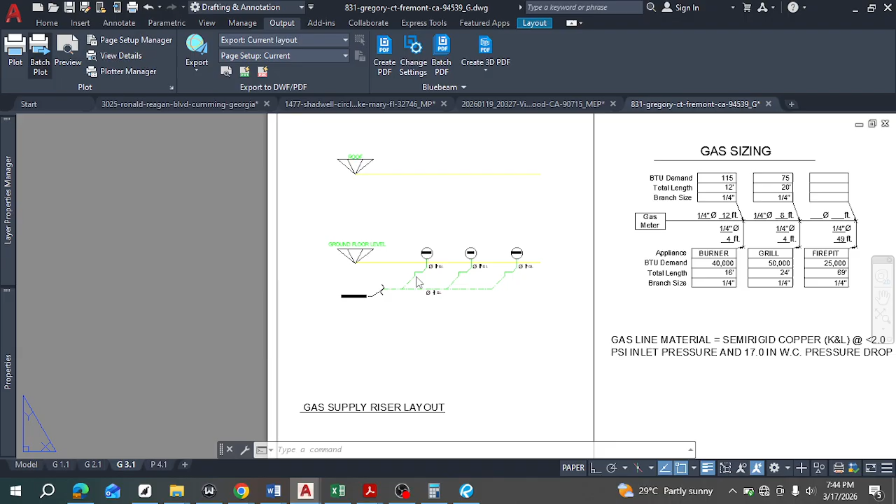No, I made a mistake. How did I even get here? Okay, so you select, go up. So you delete the one that we don't need. Okay, this is what you are left with, the last two. Made a mistake. So you say no, right? Let's try that again. So that is how it works, right? So you want to print out these 3 pages, for example. Okay, let's do that again. So I have some things already there, and I don't need all of them.

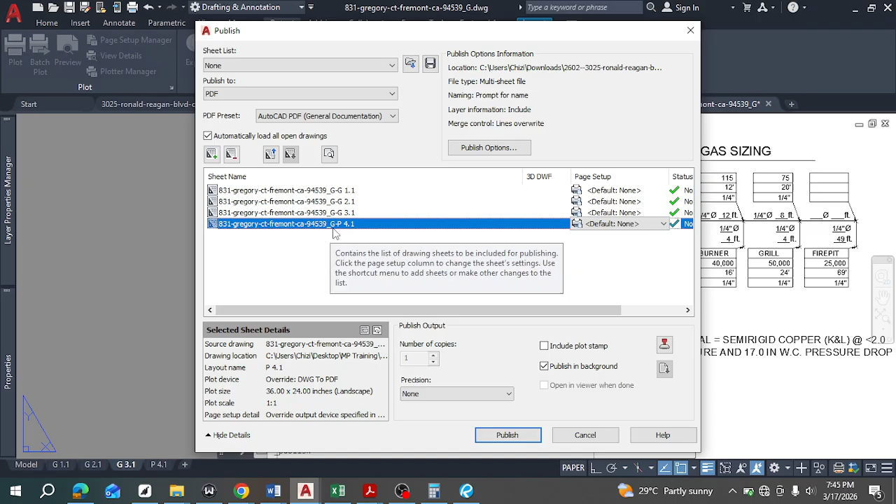Okay, so this is our model. You can see that all the pages here are the pages we have here. So you delete the model because you don't want that. You just want the pages. So this guy too, delete it. Okay, should be one of the pages. Just leave it, we'll check what it is after. Then we publish it, right? It asks you where you want to publish it. Go to desktop, go to the folder for this, and you select the gas plumbing.

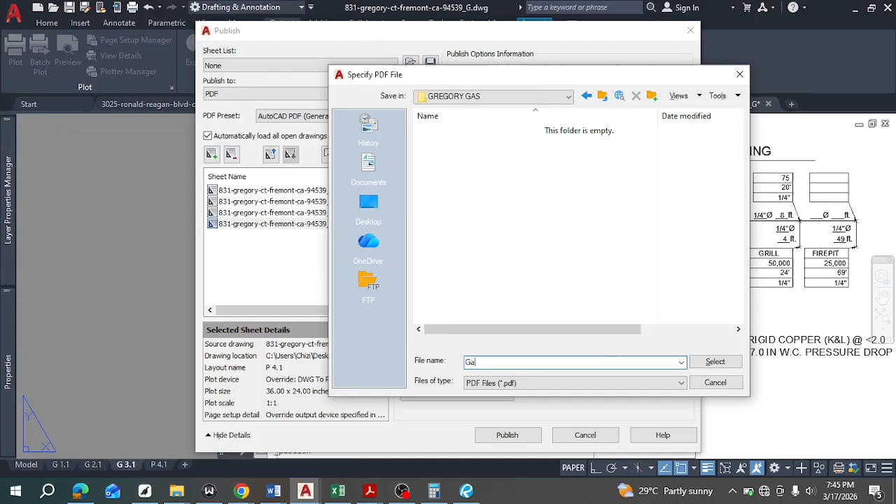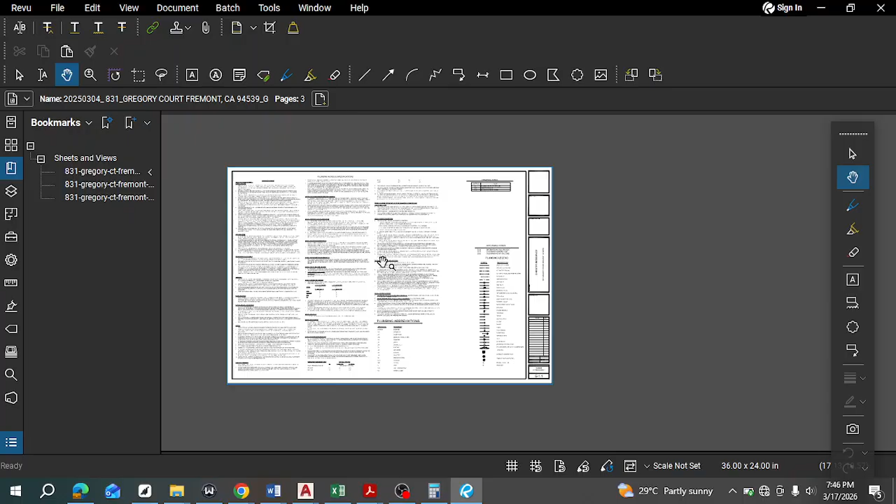Okay, so this generates PDF. Select it. No, you don't want that, right? So it takes a bit of time depending on how fast your laptop is. It's loading currently. So let's check what our final product looks like. Okay, so this is what it looks like. This is our first notes page. Then we go to the next page. Shows us our layout. Clean because black and white, and then green is very visible.

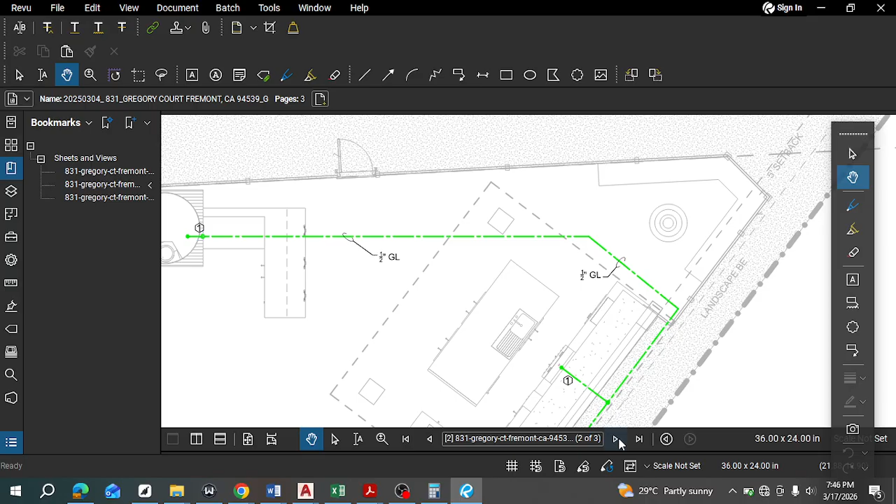Then we go to the next one. It shows us this information, the gas sizing, the pipe sizing, and then the layout. So this is what it looks like, right? Obviously, as you design more and get more experience, you're going to add more information, such as notes, all those things I was sharing with you earlier. All these things that I did not show, add them in the notes.

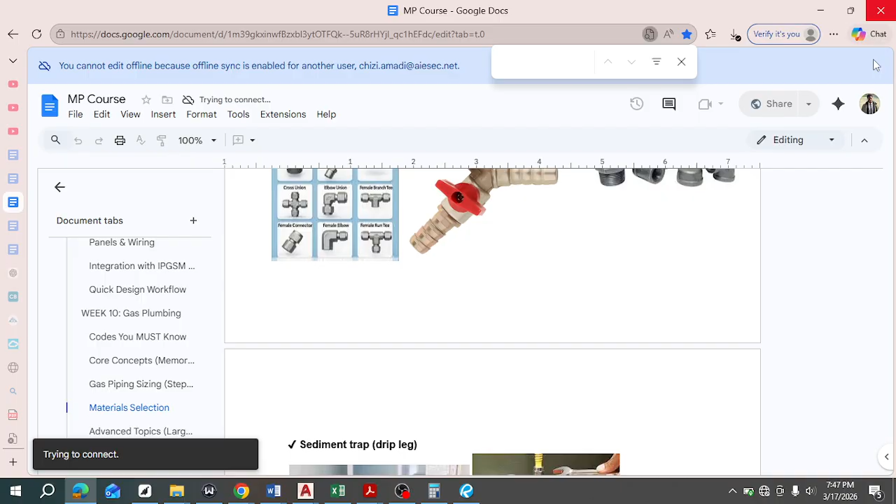You may think the notes are plenty and too bulky, but people actually read them, to ensure they don't make mistakes in installation mostly, right? Because if they do something different from what you said, you can prove that you had it in the document, but they did not do it accordingly, so it vindicates you in case there's any problem later.